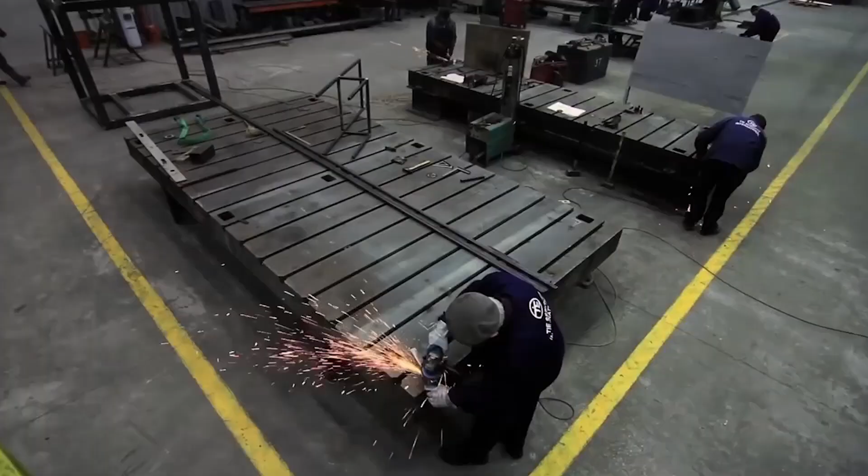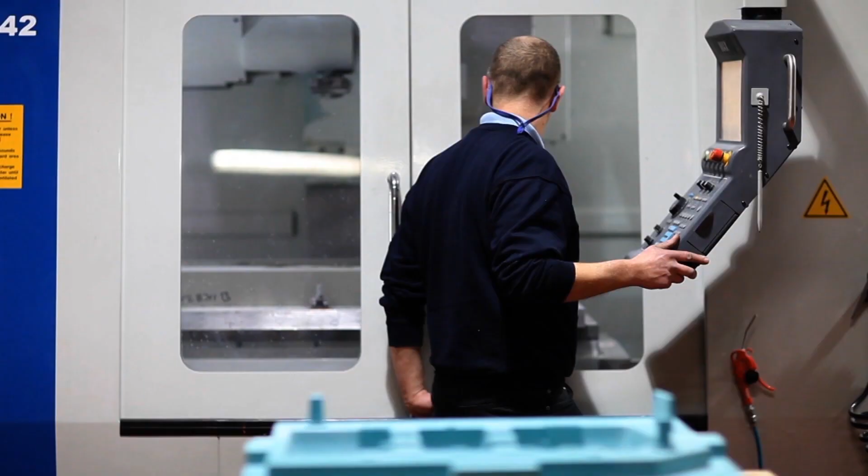Britain has a long industrial heritage stretching back over a century. From the earliest days of modern manufacturing, the UK has been a force for innovation and growth. There have been many changes over the years, but engineering continues to thrive. The move towards high-quality, high-value production has led to a renaissance for many engineers, able to compete with the world by offering the best products available. Over the next half hour, we'll talk about the place engineering has in the UK economy and how it can continue to thrive into the future.

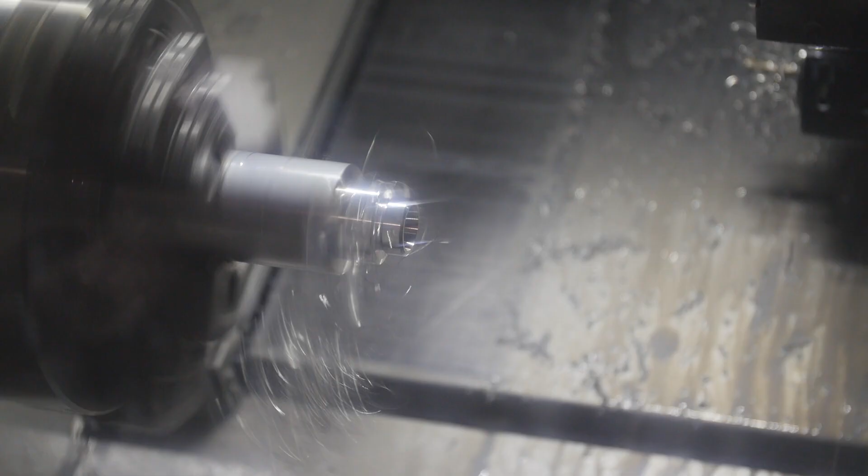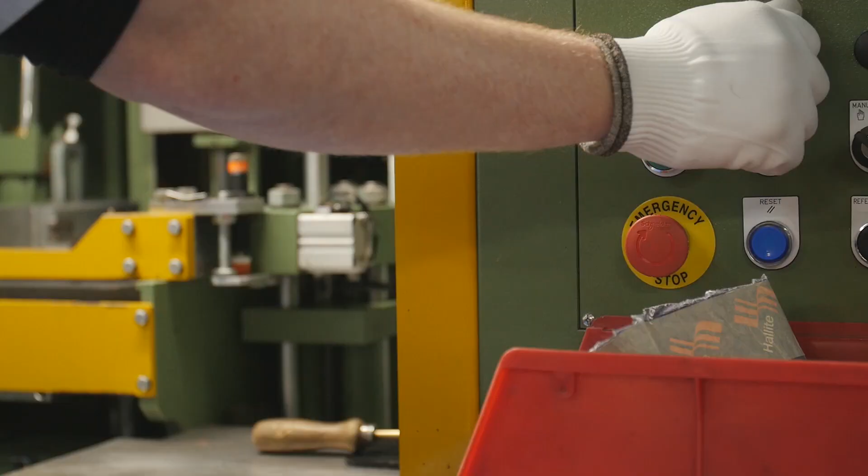I think the UK is a good place to be an engineering company. Whilst there are problems and a lot of engineering and production has been moved abroad to low-cost countries, we have proven with automotive, for example, that we can produce cars effectively and cost effectively in the UK. However, I think in the future, more and more things will probably go abroad unless UK consumers are prepared to pay more for UK products. But there is an exciting background of highly specialised companies that I think bodes well for the future.

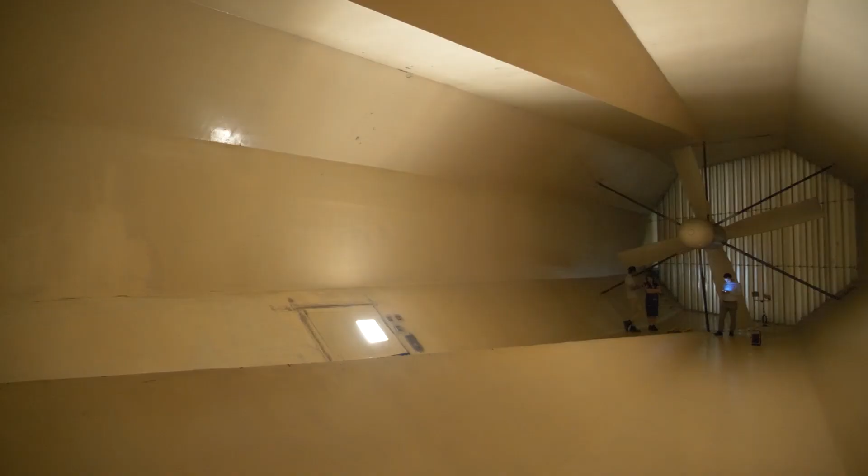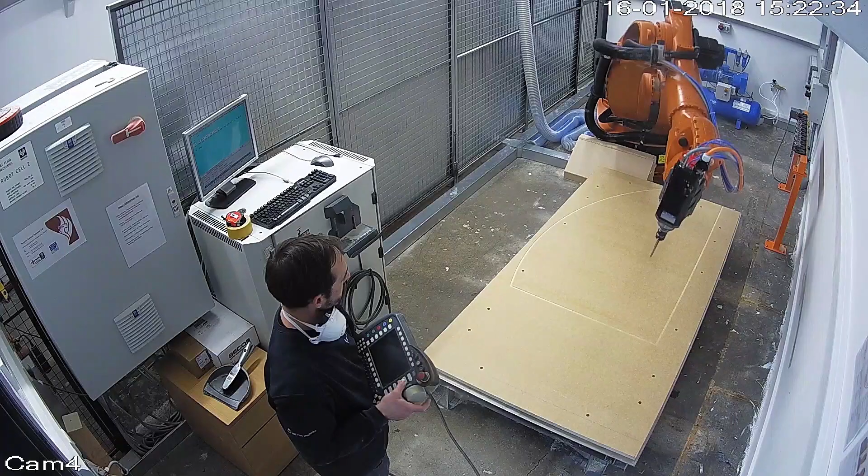I think engineering, with the wind tunnels, the history, the legacy, the fact it's so unique, you need to be a special kind of person who's passionate about wind engineering, about understanding it, solving problems, really getting to grips with engineering. You're not turning a spanner, you're actually fixing problems.

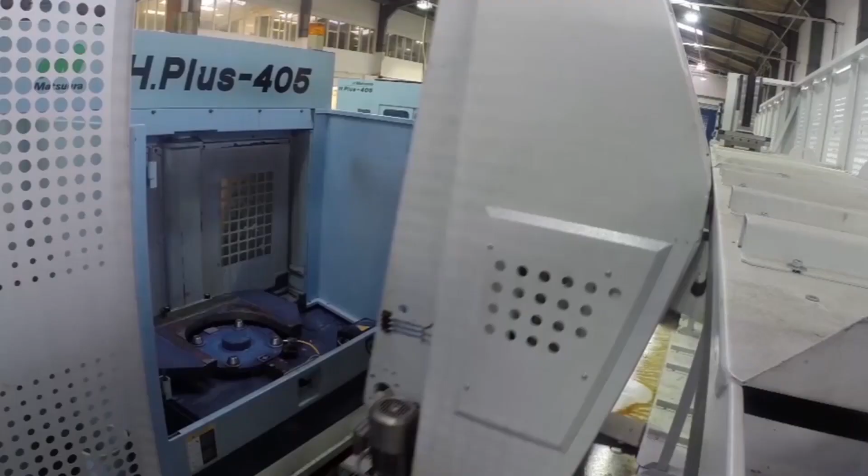The British engineering industry is quite often, if one listens to the media, you could almost think is non-existent. But in fact, I believe it is alive and kicking. It's not necessarily the sort of large companies, large manufacturers out there. It is made up of a lot of very small, very enterprising businesses that are in many cases leaders in their fields. And that, I think, is good for the future, and it shows that there is proper vibrancy within the sector as a whole, but it doesn't deny that there are problems.

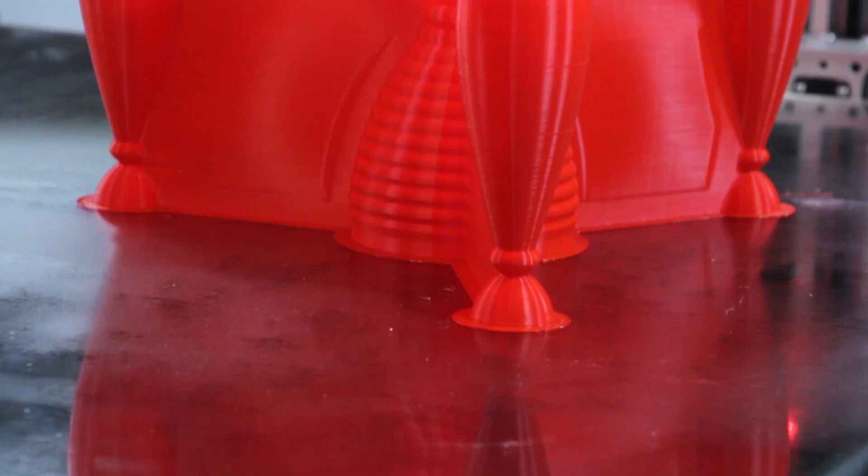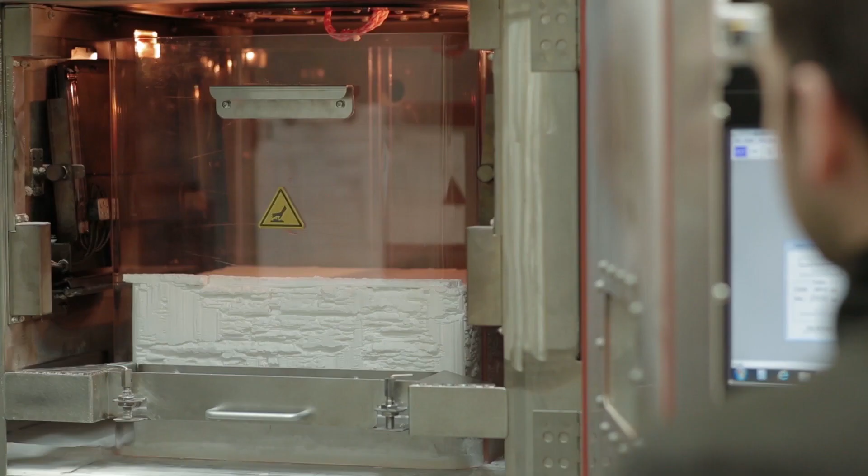In the modern world, every sector is constantly changing. New techniques and technologies are driving constant change across our whole economy, and nowhere is that more true than in engineering. Today's customers expect more from their products and expect to see new innovations coming through every year. Changing with the marketplace is critical for success as an engineer.

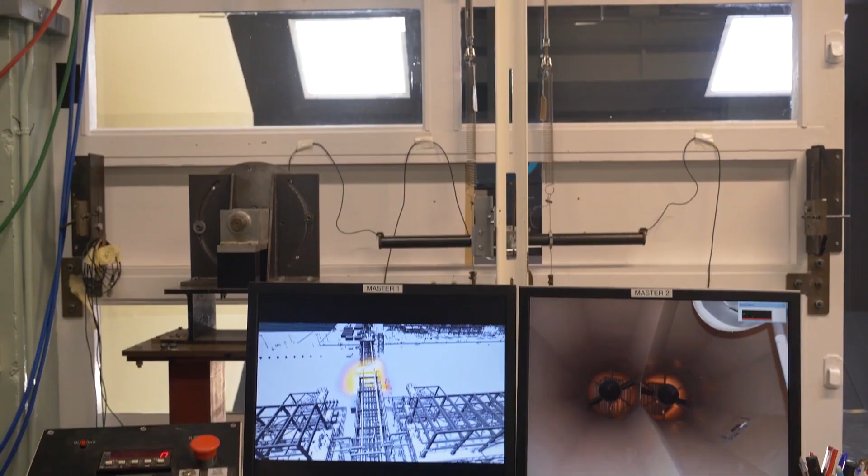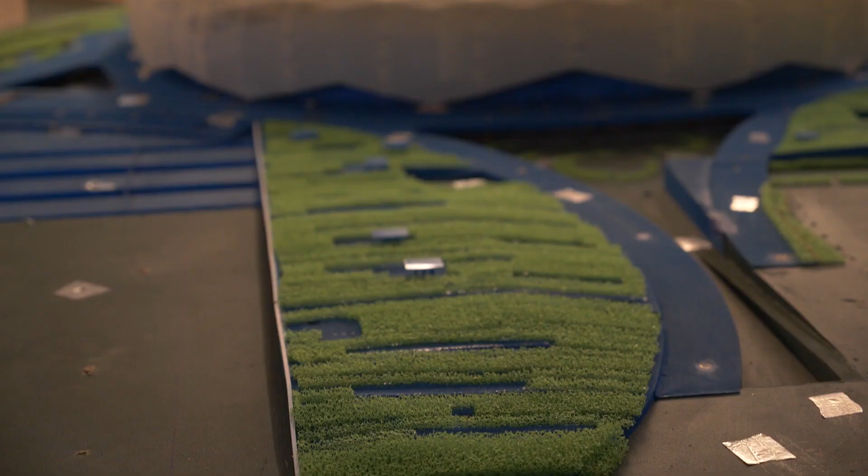Every year something changes in the market, the technology moves on, and you have to adapt. Every company has to change. Over the years we've taken on CFD, we do a lot of that sort of technology. We've increased our productivity on our models, we've got leaner processes, we've increased the fidelity of our models to increase the accuracy of everything we do.

But we've listened to our clients and we've tried to find out how we can solve their unique problems. Since we started in 1984, the market has changed enormously, not only in terms of the way we sell things, with the internet now becoming a very important way of distributing our products all over the world, but also the whole way that stuff is manufactured.

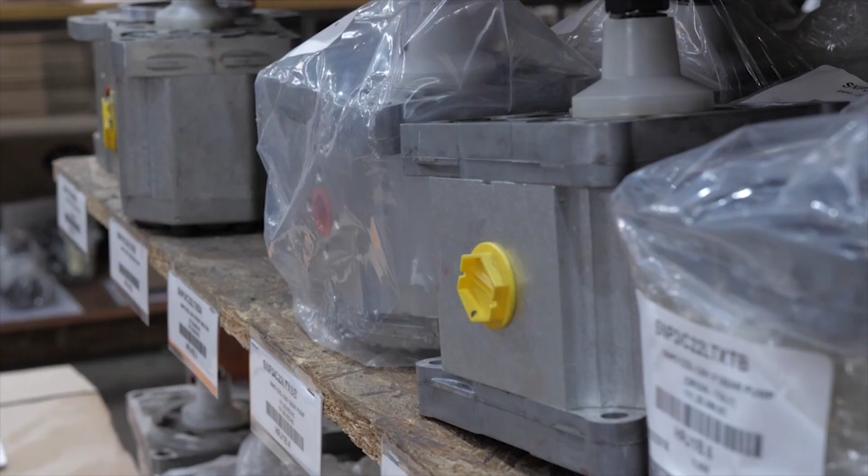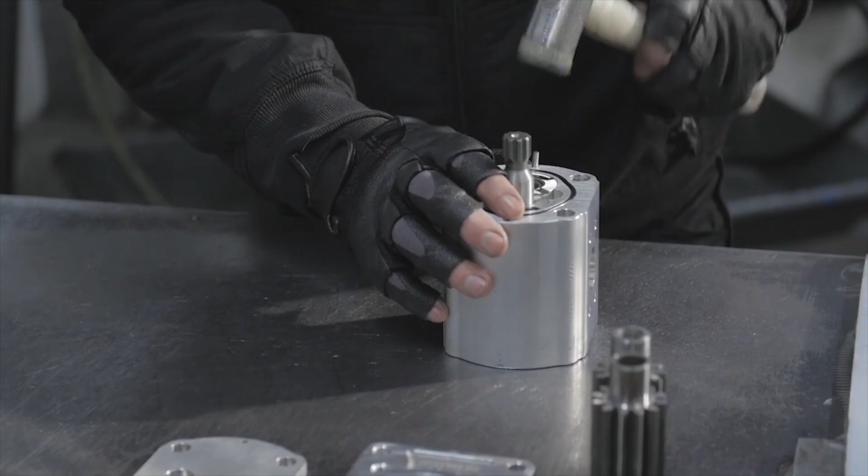The basic ideas of, say, gear pumps, which form a major part of our business, the basic concept has stayed the same and has been the same for probably nearly 100 years. But the processes in machining and manufacturing these things have allowed us to get closer and closer tolerances. Material technology has meant that we are able to now make things with stronger bodies, stronger gears, and the whole science of that has meant that we can now get improved pressures, better flows, higher efficiencies than we ever got before.

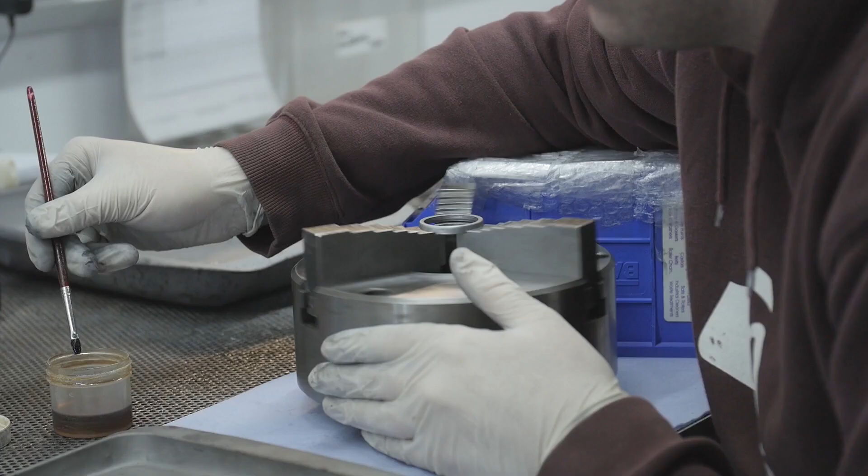I don't see too many changes in the technology of our seals in the future. We're always improving the seals as we go, but I think the changes and improvements are more due to design and our own know-how and understanding of how products work in difficult and new applications. So we're constantly being challenged by new technologies.

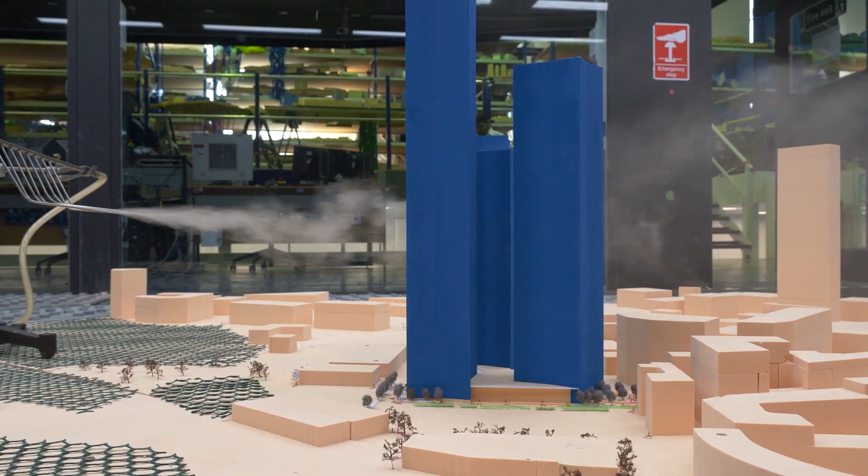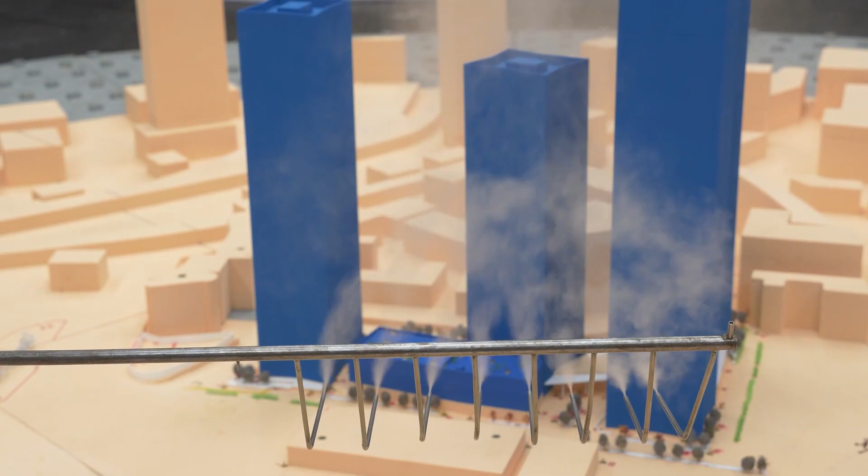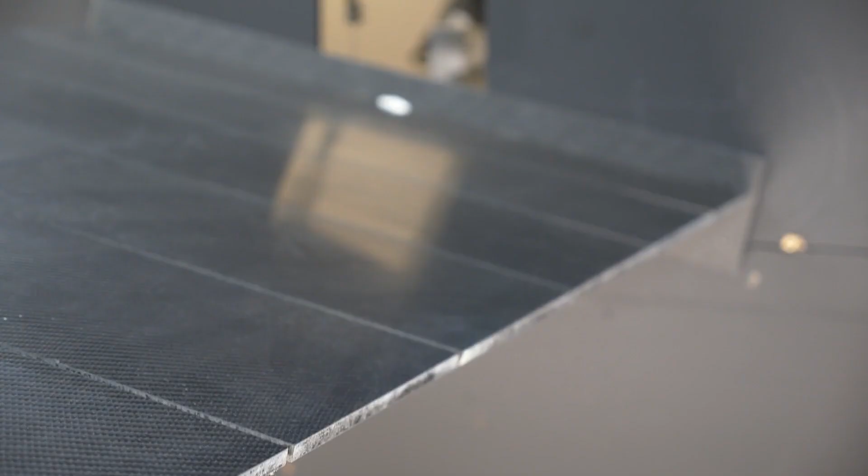What is challenging is the bespoke nature of some of the designs that we tend to get involved with. Designers do push the boundaries of what can be done every day, which is exciting. And we, as wind engineers, are there to guide them and make sure they can deliver successfully and economically the vision they have.

Along with Germany, I think the UK has got a good reputation for high quality and innovative products. I think one of the main issues we have is that when we develop a new product, all too often we see that technology go abroad, so it's lost to the UK, and we don't benefit from that innovation in the longer term.

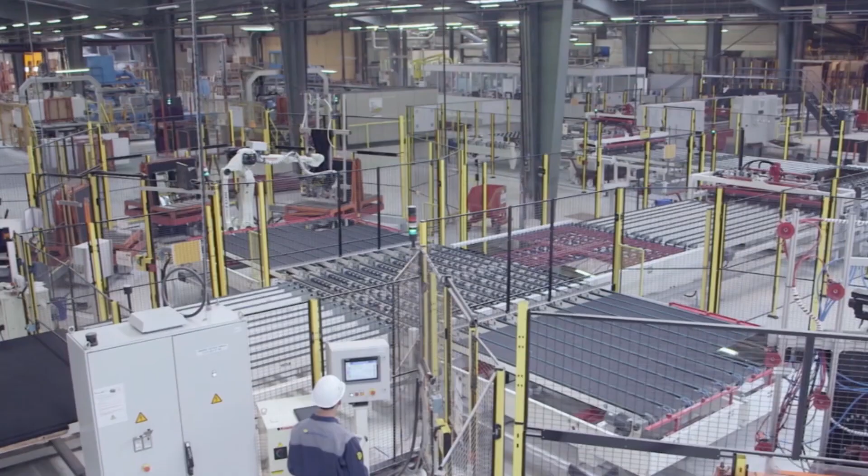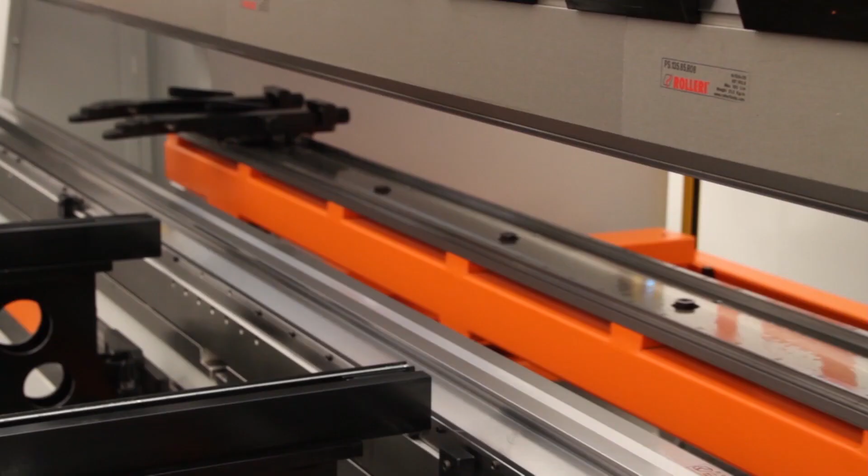Today's engineers offer more than just production services. More and more, we're seeing engineers offering a more collaborative, bespoke service for their clients. Taking a role in product design helps engineers leverage their expertise and provide greater value for their customers than offshore producers could achieve.

Typically, when a customer comes to us for a new component, we would visit them, take a look at what they're doing if we're not already familiar with it. Then we would gather all the information related to the component and the criteria they're working with, things like temperature, speeds, pressures, this type of thing.

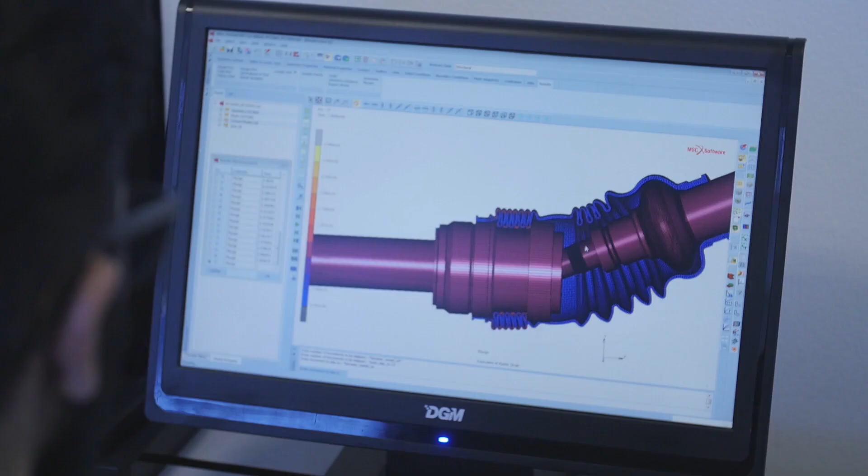We would then input all of this data into our design department, and the guys would look at it. They would come up with a basic design, put that through the FEA system, and model the design until we're happy with it. Then we would move on to production.

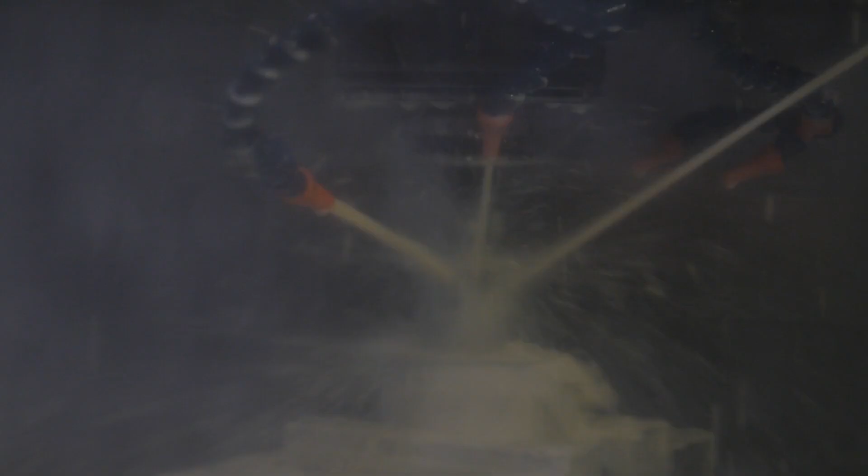So there'd be some initial sampling. Those samples would then either be tested by us or at the customer for initial approval. Once we've been through all the testing procedures and everyone was happy that the parts had functioned correctly and to the satisfaction of the customer, then we would move on to production.

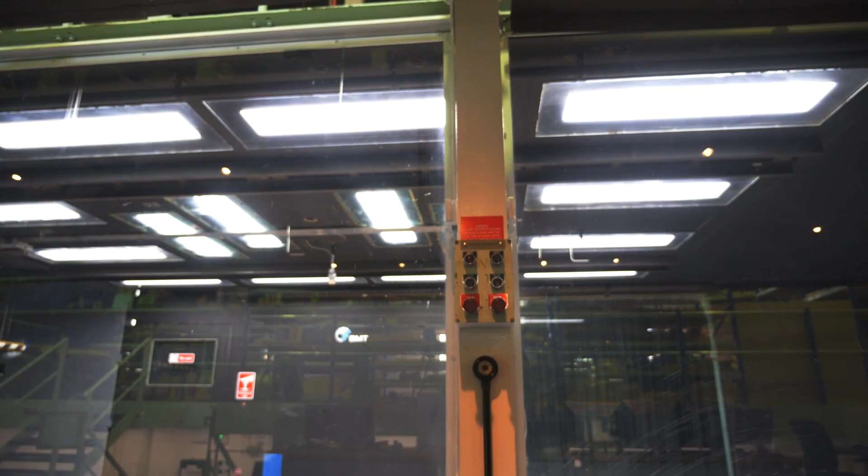The advantage of the wind tunnel compared to numerical simulations, especially within the context of relatively short timescales, is that it has the ability to model in a much more robust manner the turbulence which is in the wind. Turbulence is what can be perceived as relatively annoying when you walk between high-rise buildings. So if you think about that sort of force that can flip up skirts or turn umbrellas inside out, that is the turbulence, and that's what's quite difficult to capture inside a computer still today.

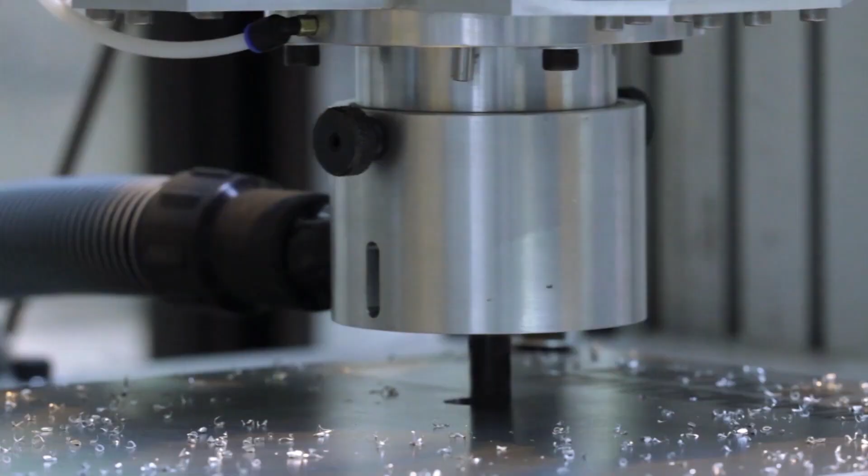Investment is a critical part of engineering. New machines and new techniques are constantly being developed, and embracing these advances is essential to keeping a competitive edge. Making the right investments can be extremely challenging.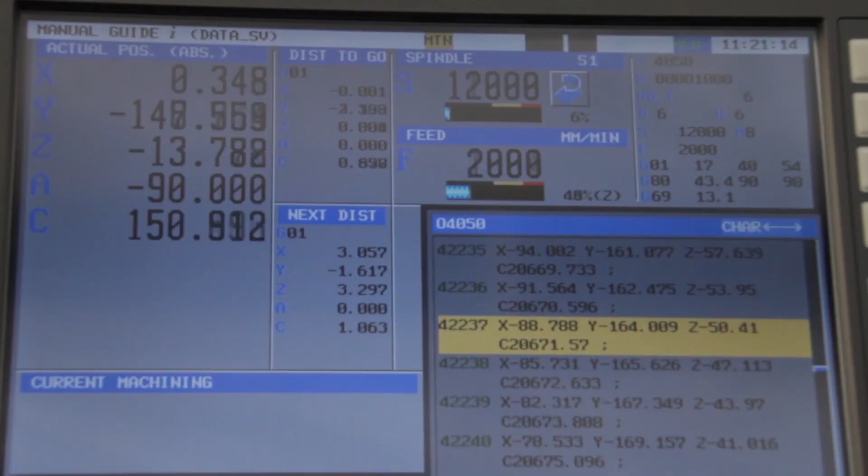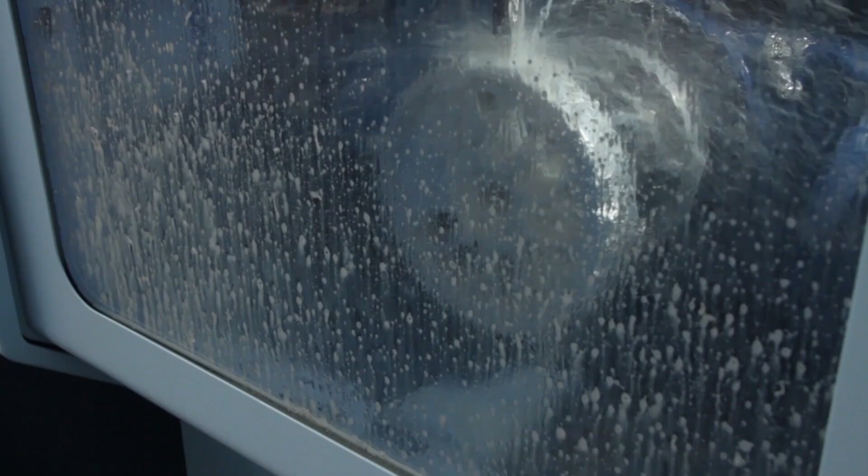Finding the right times to buy into new technologies requires both a clear understanding of the market and a robust knowledge of the technology. But for those who make the right investments, there are huge advantages to being first to market. There are businesses out there, very vibrant, particularly small businesses, who don't look on needing a payback within six months, but actually look to a long-term return on things.

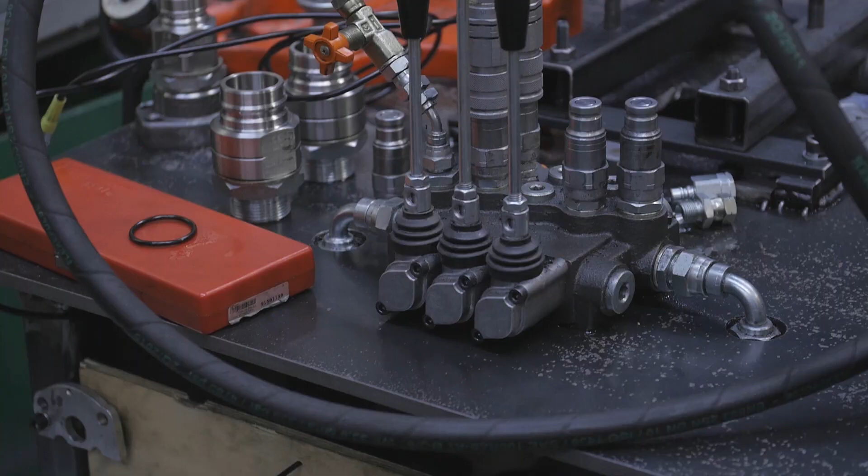And are investing in new equipment. You just have to look at machine tool sales, which are very strong in the UK at the moment, because firms are investing in new equipment.

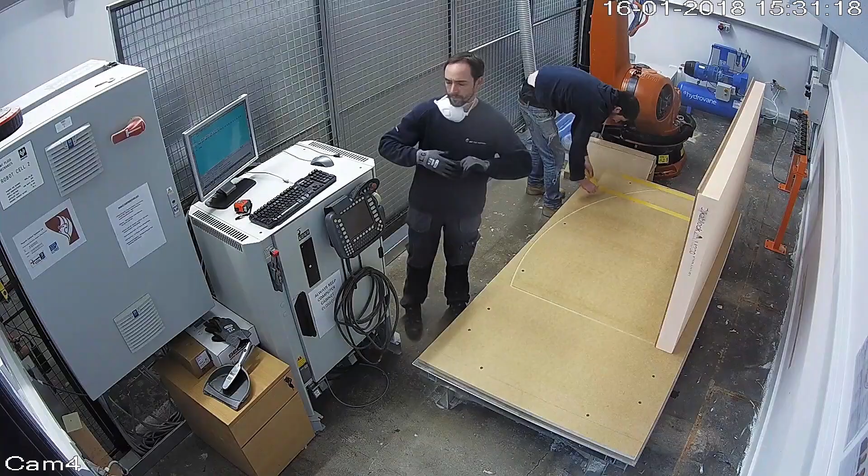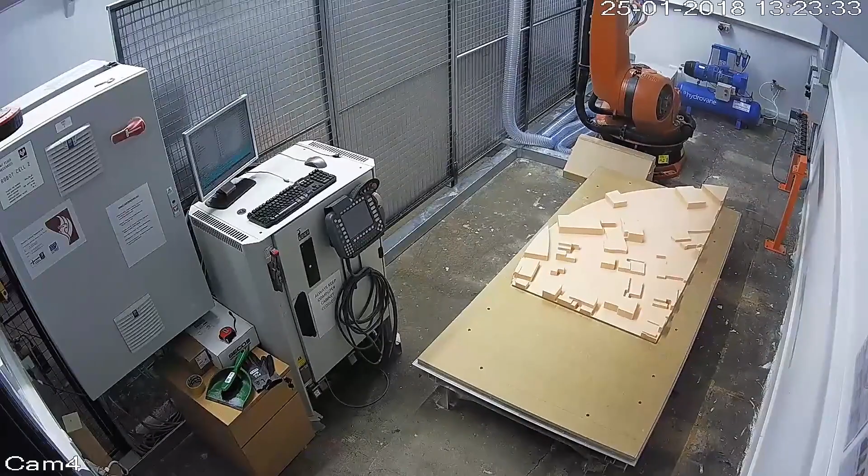And it is essential that we do. Our life is inevitably becoming quicker every day. Everybody is expecting results yesterday. There is the need to push quite hard in new technologies, a smarter use of big data handling, for instance. So I can see quite a lot of potential in technologies like machine learning and artificial intelligence.

I think it's been really important for us to keep up with new technology and have new equipment, and also training our people. We can't afford to drop behind. We're trying to be at the forefront of sealing technology, and this demands that we have up-to-date equipment and look forward to where sealing is going to go in the future.

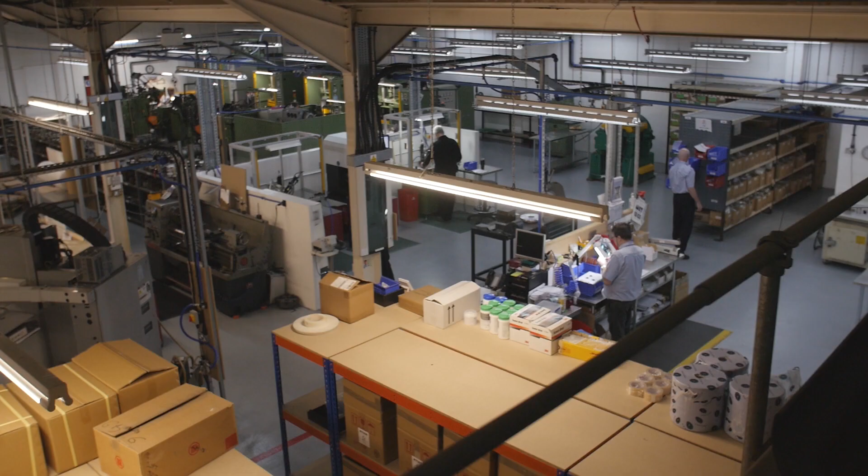Automation is a key factor, particularly in the UK, because we need to take the labour cost out. The ability of automation, and things like additive manufacturing, which is a very new process, still has a long way to go, but it has the potential to make products better and faster. It's a few years away from that, though - at the moment it's very expensive.

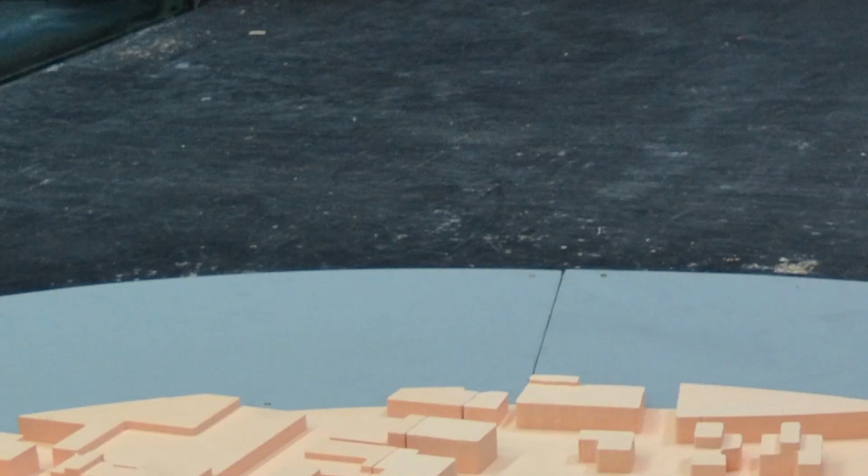Computer simulation, numerical simulation, started becoming used commercially, especially in wind engineering, roughly I would say between 10 to 15 years ago. So in that sense it is a relatively recent trend in the industry.

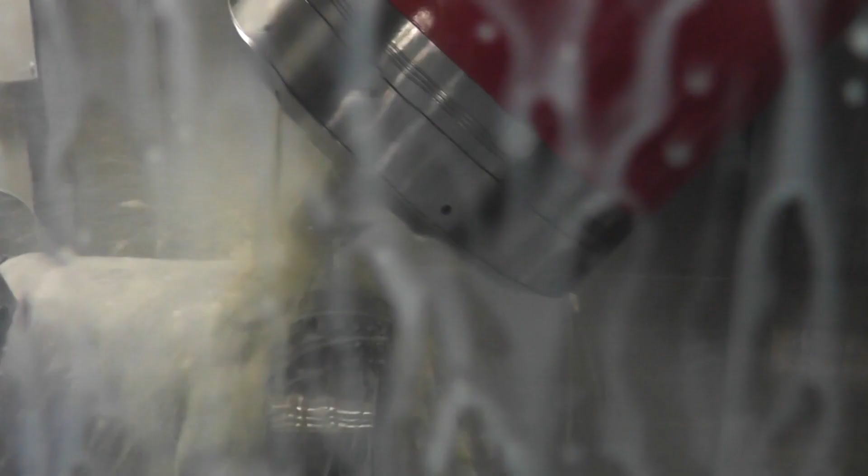Modern engineers need to have a broad base of expertise. They cannot afford to be overly focused on singular materials or approaches. Bringing together a variety of techniques and the expertise to combine different materials is critical to serving the modern market and delivering ever more complicated products.

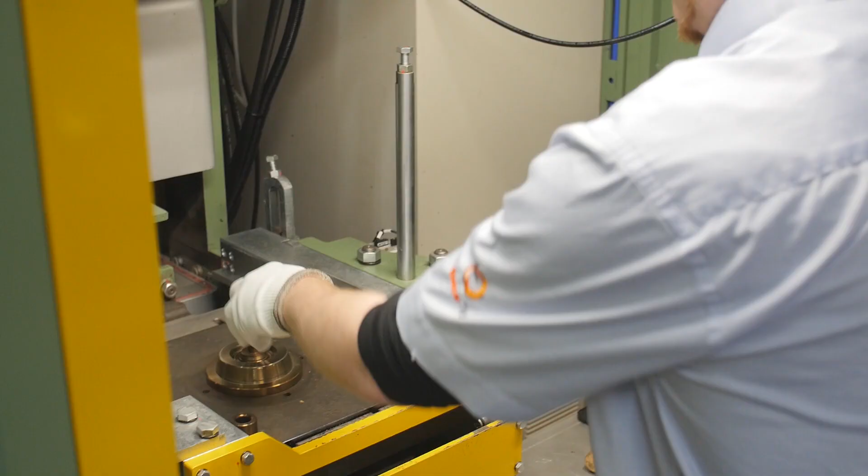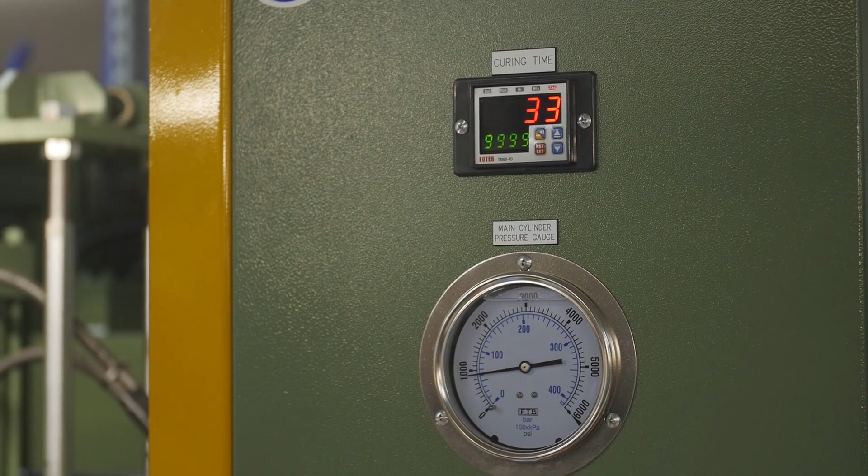The manufacturing of seals at Race-Tec is carried out through a process called compression molding. Typically in a seal there may be a metal component, a rubber component, and a PTFE component. All these parts go into a mold, then into an oven under pressure, remaining there for typically 5 to 8 minutes. When the part comes out, it's in a semi-cured state, but fixed, so dimensionally it's stable. Once out of the mold, it goes to finishing, trimming and inspection, checked to make sure it's dimensionally accurate with no faults in the rubber.

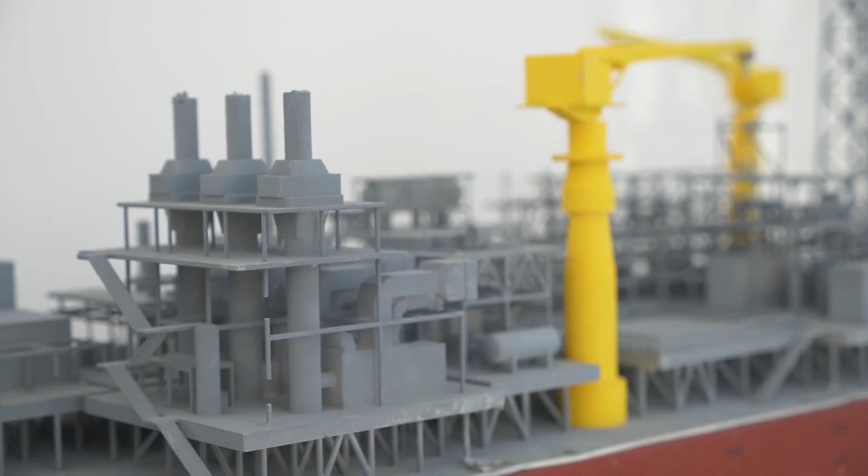In a broader sense, fluid mechanics is used to assess the aerodynamic performance of other types of structures as well. It can optimize the performance of Formula 1 cars or supercars, or from a hydrodynamic point of view, structures which lie underwater. You can take it to another extreme and study biological fluids like blood.

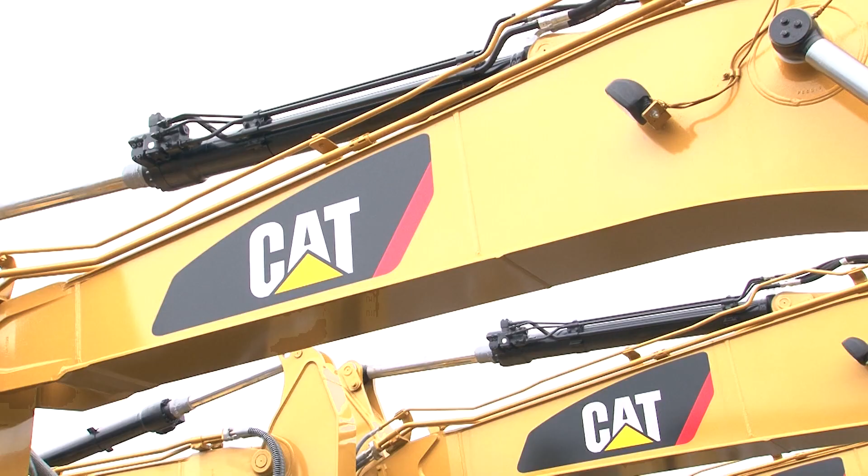Hydraulics are a major part of an enormous number of industries, but probably go pretty unnoticed. When you look at an excavator and see arms extending or buckets lifting, that is quite obviously hydraulics. But then look, for example, at a gritter going past - the conveyors and the spreader are probably all driven hydraulically.

The brakes in everybody's cars are hydraulic. Quite often it's used in disabled access machinery for lifting people in and out of baths - it's hydraulic. So hydraulics pervade really every area of our lives.

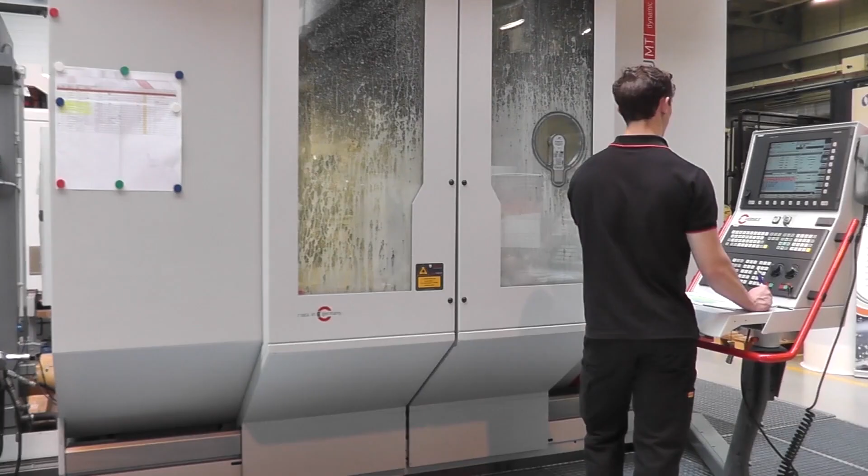People are a critical part of every business. In manufacturing, achieving high-quality results demands a well-skilled workforce who are able to adapt to a changing workplace. For many engineers, the arrival of greater automation has driven investment in skills and training, ensuring that staff can continue to contribute and bring fresh ideas into the business.

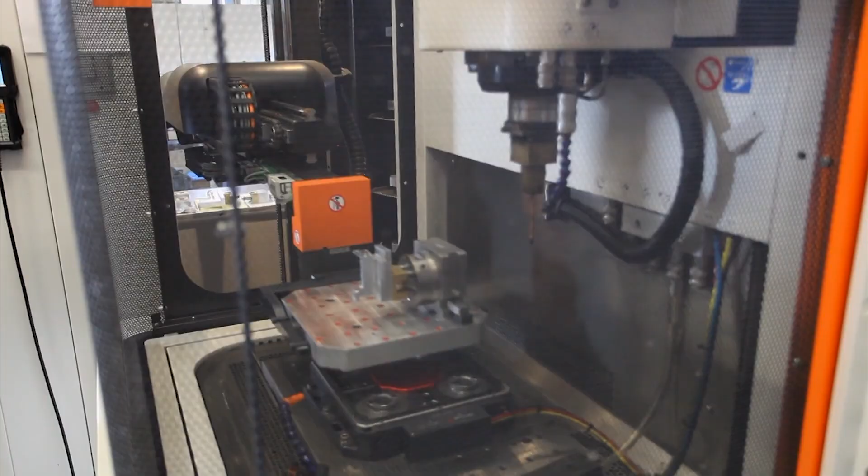UK employers have been too ready to take on relatively low-cost labour from Eastern Europe and elsewhere, rather than actually investing in improving the productivity in their businesses.

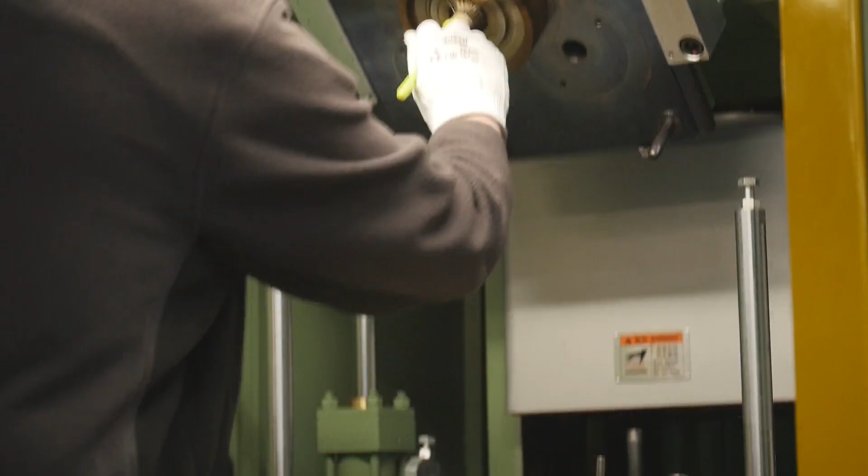One of the main challenges we face at the moment is finding the right people. Sometimes even finding qualified people is okay, but finding people that can actually help move our business forward - that is even more challenging.

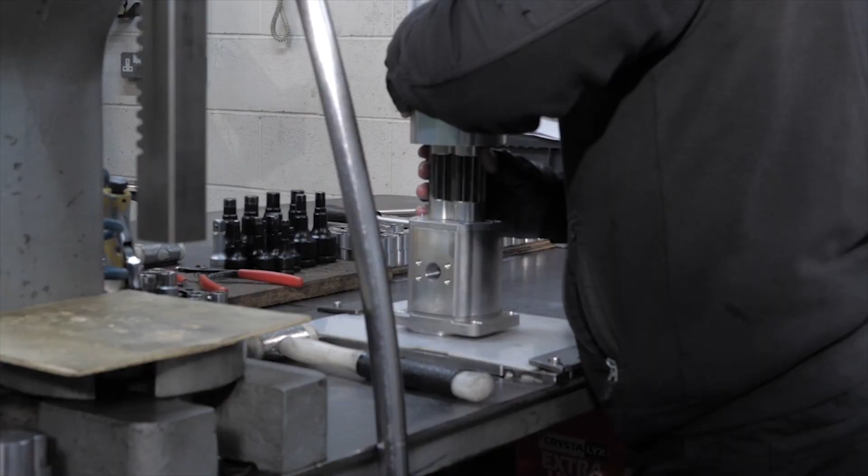I think there's been a big problem with new talent coming in. Looking at it from a mechanical engineering perspective, which is the field hydraulics most closely relates to, there's a lack of practical knowledge that graduates coming into the industry have now, whereas before they had to do an element of practical work. Now a lot of things are theoretical, and they have very little perception of what materials feel like, what actually happens when you cut metal, what happens when you actually integrate components.

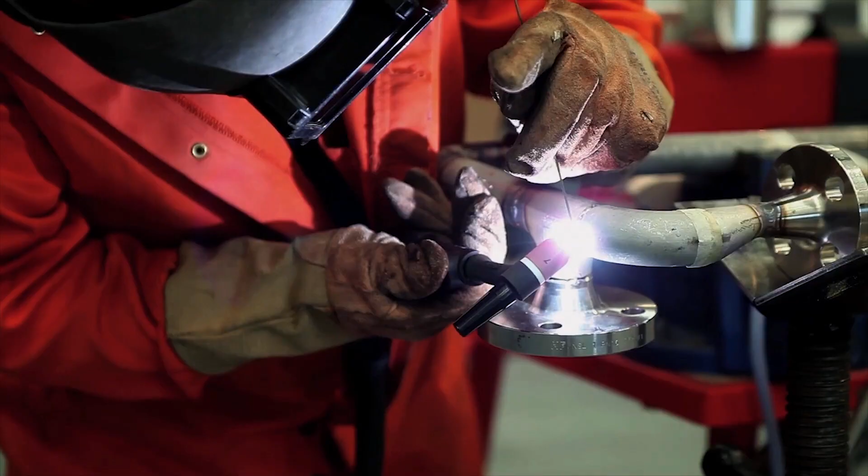Everything's been on paper or modelled, and it's not the same thing. You cannot model what a bit of steel weighs. This whole practical side of things, I think, has been ignored.

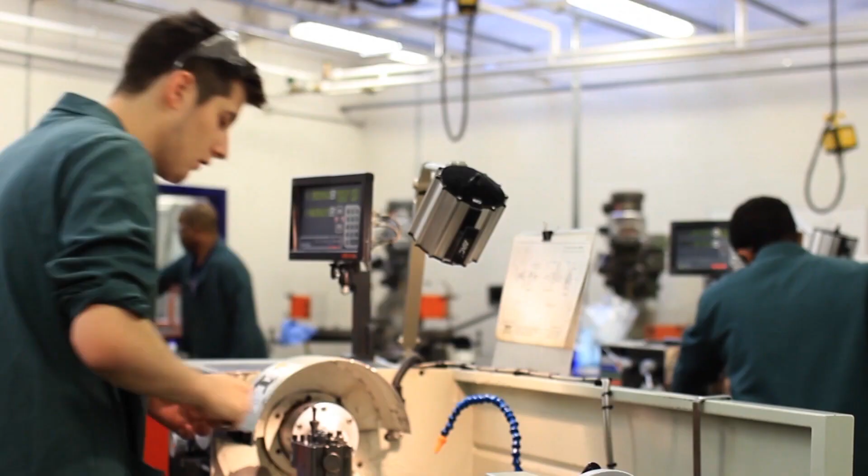In the UK, there appears to be a distinct lack of interest in engineering from young children. I know when I look at my own sons and compare it with how I came through engineering - it's not encouraged in school. The profile of it is not high enough in schools. The whole business of getting young people to actually see engineering for what it is, and see the breadth of skills that are there, the breadth of areas where it is used.

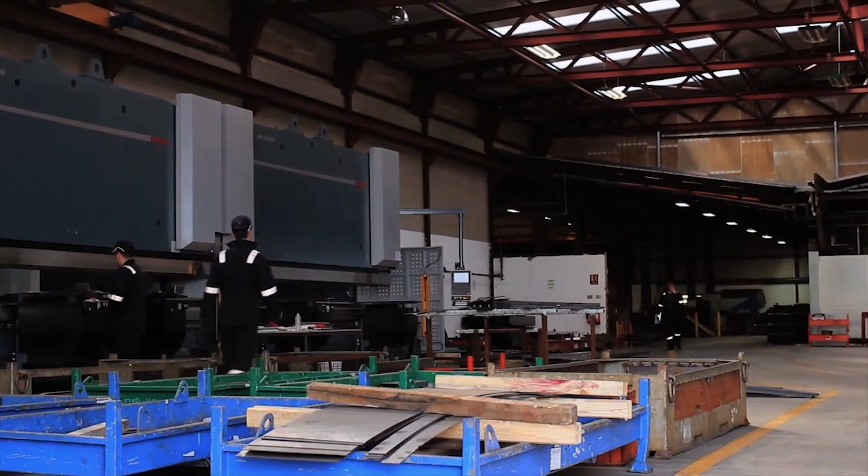There are a lot of people my children's age who have gone to university to do engineering, and they have no intention of doing engineering when they come out. They all want to go into the city or something like that, which actually, if they go into engineering, they can probably in the long run do as well and have a much happier, more fulfilling life than sitting in front of a computer screen counting their money. There's already a shortage of engineering staff in the UK, and it's something we should tackle during the Brexit process.

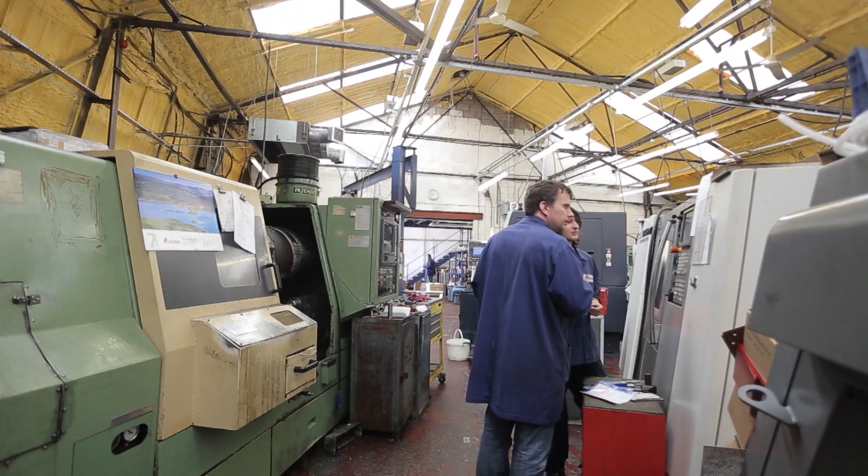The next generation of engineers is a critical concern for today's engineering sector. We often hear how young people are less interested in joining the engineering sector, and the industry has made real efforts to change that. Through apprenticeships and graduate programs, many companies are bringing young people into the workplace and giving them a taste of what the industry is really like.

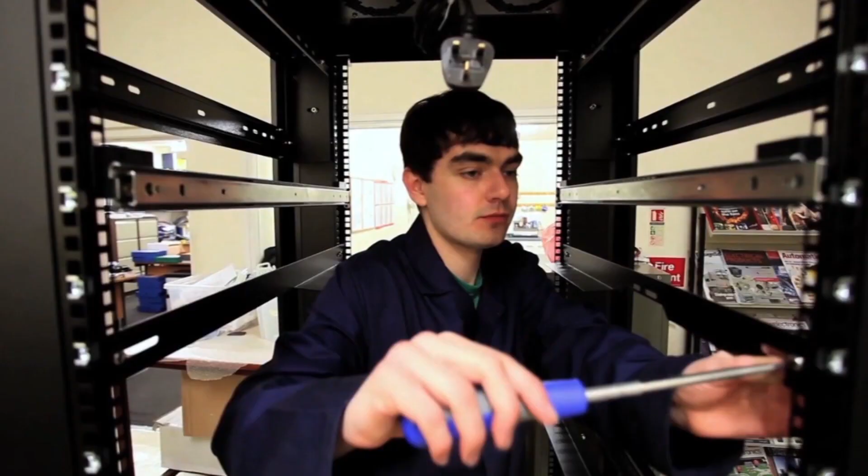The engineering industry has to start taking a more active role in attracting talent. I think the key to this is getting people involved from an early age and really building that interest. We're going to need to start talking to local schools and teachers and getting young people interested in engineering. We do get a lot of graduates inquiring about it.

We get people that have done, say, maybe aeronautical engineering, mechanical engineering, civil engineering. There's quite a lot of sectors and degrees that can flow into this field, which is great. Even mathematics and analysis and statistics will flow into this field. And we find that if you're the right type of person that's got this passion to learn, then we can mould you and teach you the different parts that you need.

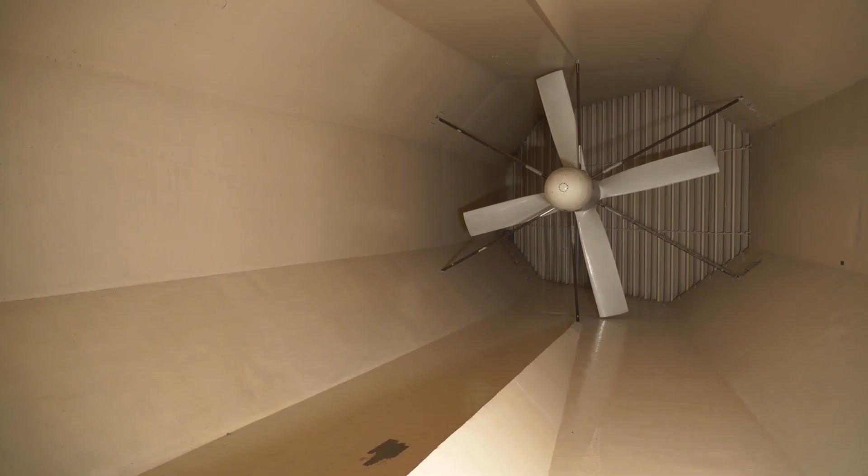We do get that. So we take on graduates and apprentices most years, build them up through the company so they have day release, back to university, things like that. A lot of the time we take them on as our wind tunnel engineers, wind tunnel technicians, but then they move into the project management engineering teams, and we basically build people up through the company.

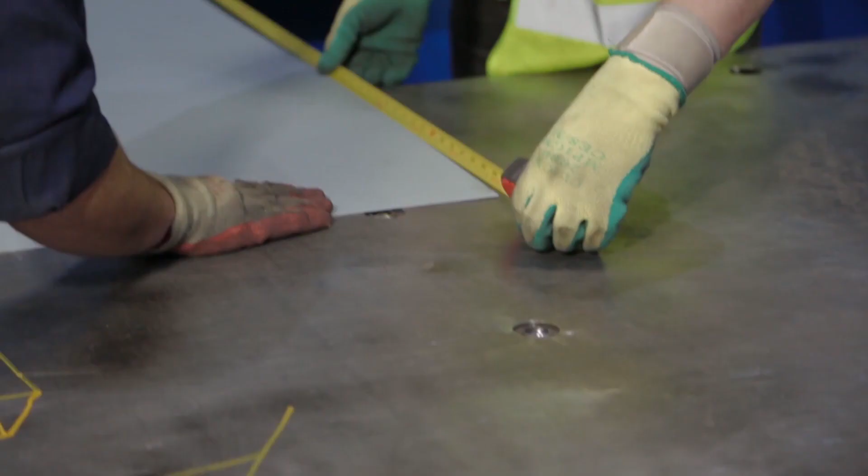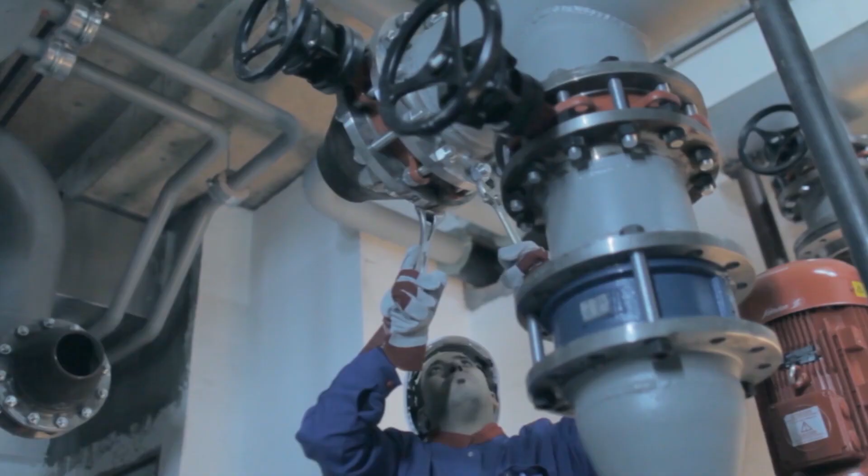Apprenticeships have funny connotations for different people. But what actually being an apprentice, if one goes back to the basic meaning, means somebody who will learn from someone else, learn from someone who has already learnt how to do something. And I think the problem we can have with apprenticeships, and I think they're good, but they should not become a sort of rigid structure by which this is the apprenticeship path, because we are all apprentices and we should all be apprentices all our lives.

We have some top quality universities that are driving research and development and working very closely with UK companies. That pushes us forward, and it gives us the benefit of being able to work with those innovations and technologies and monopolise on them before they can be picked up in other countries.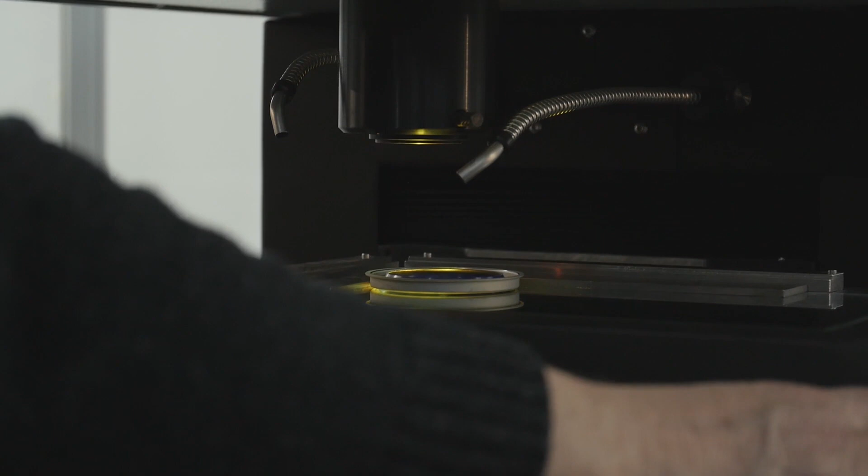Young people coming through university are often not looking to get into the more practical side of engineering, so this does create some problems for us. I think we really could do with getting the prestige back in engineering, so that people do look at it as a career.

In schools these days, they no longer seem to teach things like metalwork and woodwork and technical drawing, which are things that typically engineers of today would have done when they were at school. It more seems to be design and technology, which doesn't really give them maybe some of the hands-on training that our generation possibly had. And also the type of equipment people are buying these days.

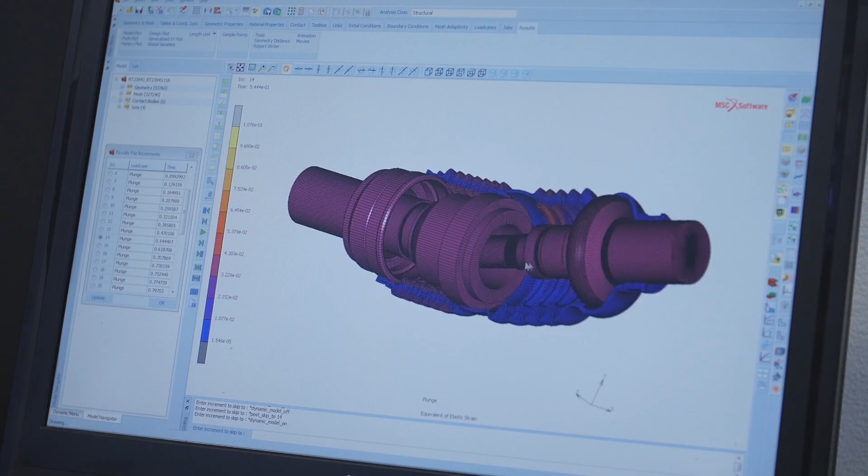We're in rather a throwaway society. I think many of the engineers today, when they were growing up, would have been fixing their own bicycles, fixing their own motorbikes, fixing their own cars. Whereas nowadays people tend to buy things, and if they have a problem with their high-spec bicycle, they take it to the bicycle shop and get it fixed. So a lot of these hands-on skills have been lost, and I think that's something that maybe the government, certainly education and industry, needs to try and improve on and start at a younger age.

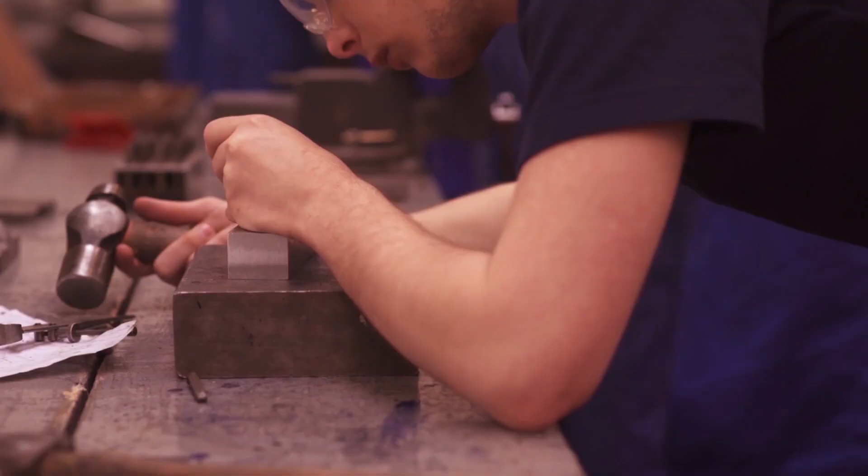I think it's important for industry to engage with schools and universities. It is difficult for smaller companies to do this because often the resource and the time isn't available.

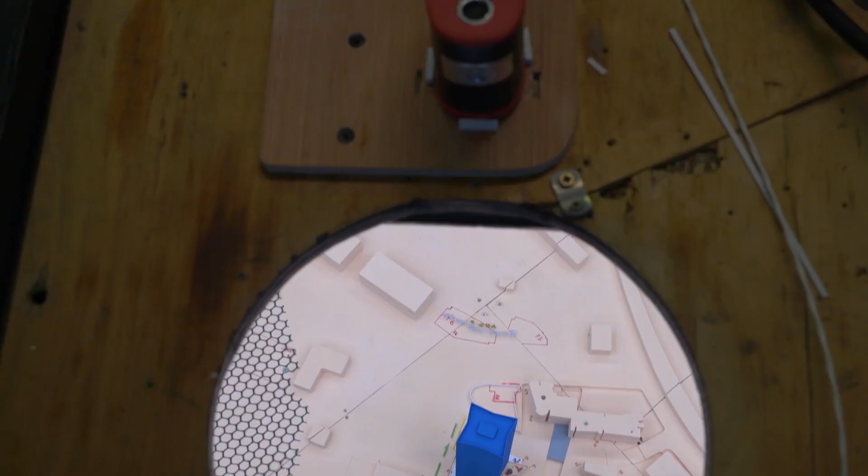So I do think it's something that the government should probably lead with, and larger industries should try and get maybe more schemes and more support for younger people to try and get them back into engineering and put the prestige back in engineering. We also offer 6-month internships for people coming out of university. We often find that this gives them a great foundation for moving on somewhere else in the engineering world.

Or they come back to BMT and start their career with us. As a company, BMT is highly dependent on attracting staff and talent from the EU and beyond. Moving forward, there's some uncertainty over whether we'll still be able to do that, and it's a real challenge to the industry.

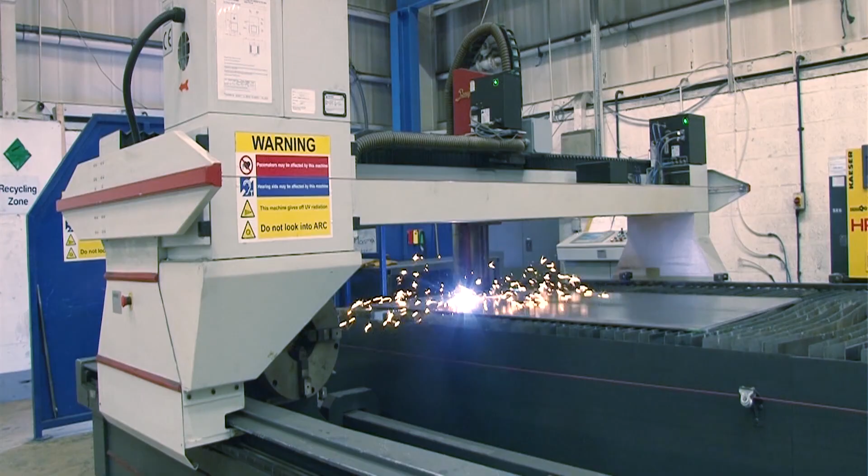It's an exciting time to be in engineering. The future promises many exciting changes in the coming years, with new materials and advanced products becoming the standard across the industry. The only real certainty for engineering is that it will remain critical to all of us, and the kind of products we need will continue to change.

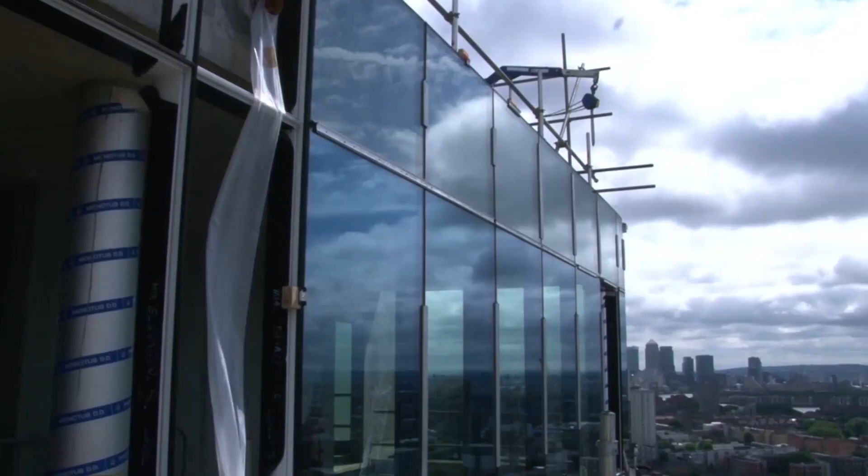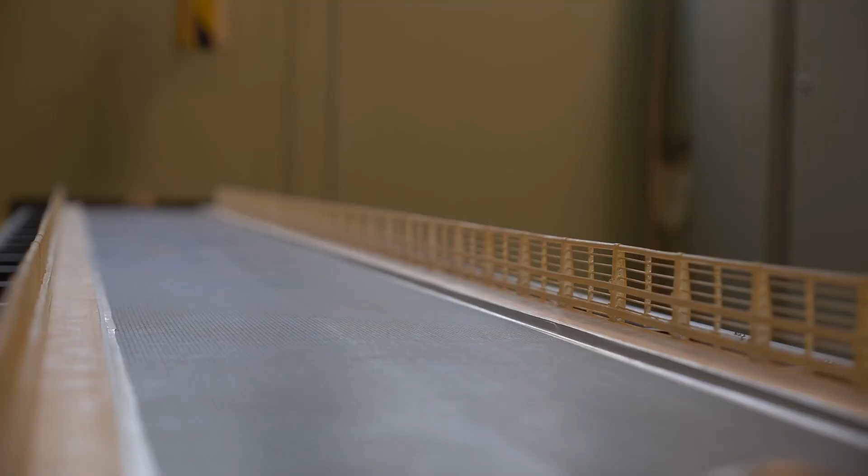I think the future of construction is incredibly exciting. We can already see today where the future is actually going. We've been using, for example, 3D printing technology here at BMT for quite some time. We have more recently bought a couple of robots which are helping us in making the models that we need to use for the testing that we are conducting.

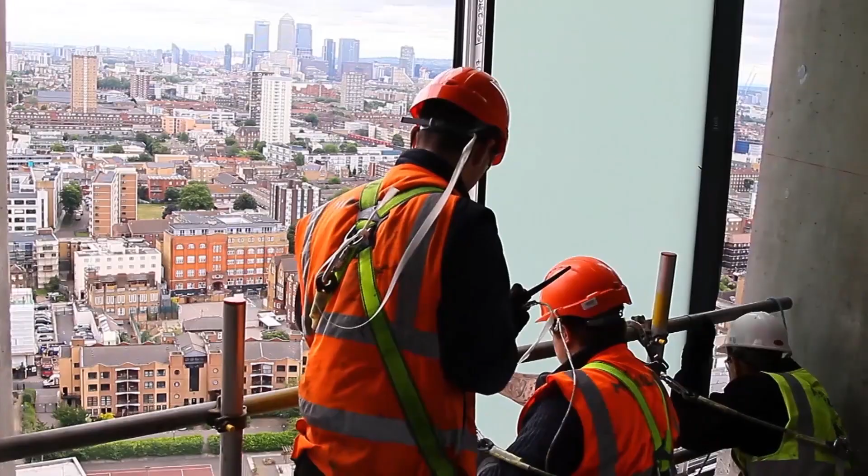And then at the same time, if you look at the wider industry, the same kind of technology, and therefore robots, 3D printing, has been used or is started to be used more recently. We know that, for instance, there's a strong push, especially here in the UK actually, on modular constructions, which is nothing particularly new, but people are actually pushing boundaries, started using that technology for taller and taller buildings, and obviously that's why they need input from people like us to actually making sure that everything is going to be designed and built in a very safe way.

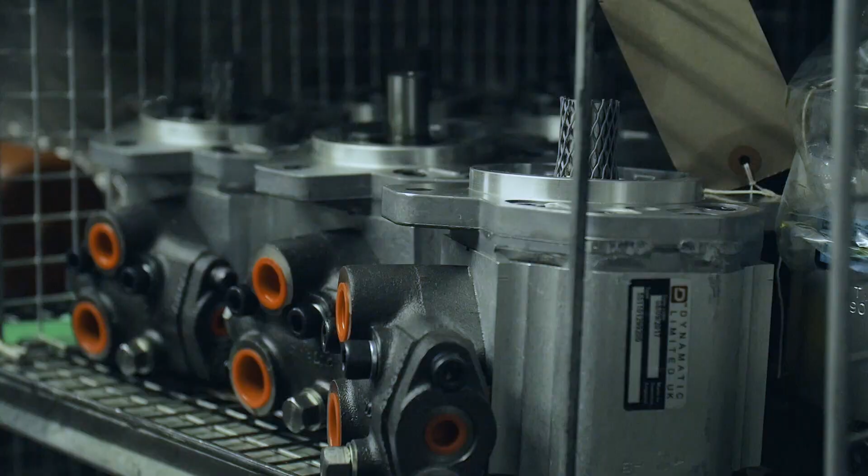Growth in the coming years for our products is going to be... I always think it's going to be a continuation of what you're doing, but I found over the years that does not work. We've had to sort of not exactly reinvent ourselves. We've always done hydraulic since the very early days. We've always done hydraulic components.

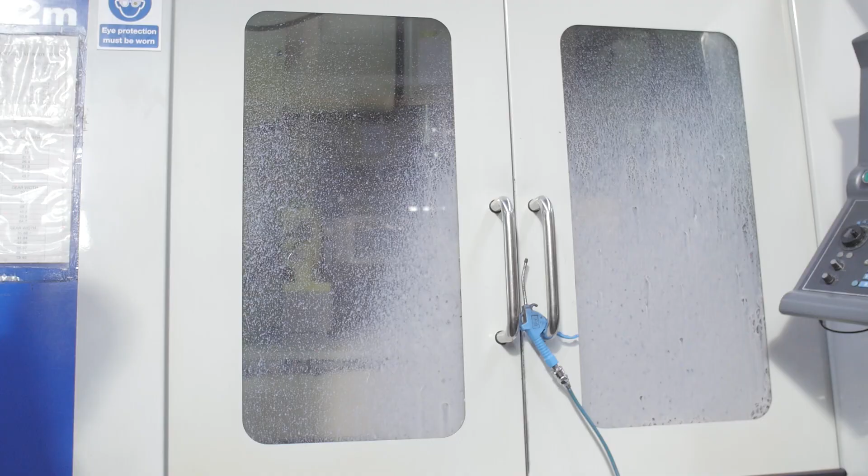But we've seen how we used to sell a lot of bulk products, lots of, say, one part number to one or two customers, and that formed a large part of our business. That's almost totally disappeared, and so now we're selling a large range, but in very small quantities, to a large number of people. I see our skills developing in terms of increasing the range of pumps that we actually manufacture here, which basically started as something to complement the range that we distribute, and it still does.

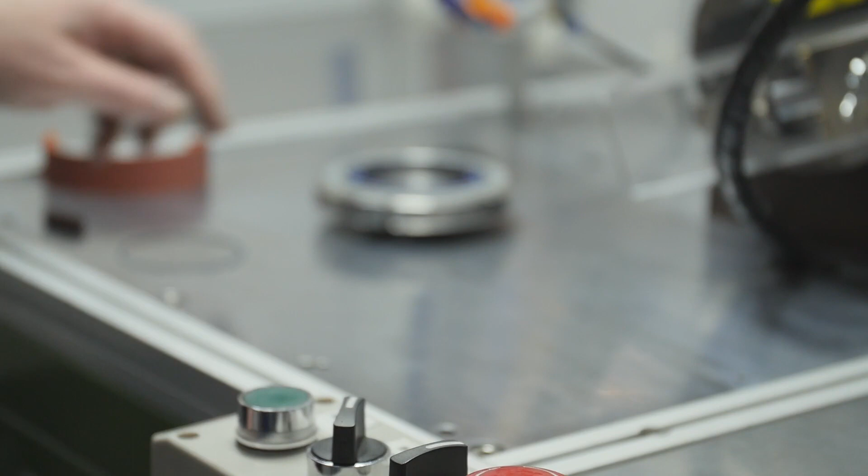I think the future is quite exciting for everybody. There are lots of high-tech industries within the UK, and if we take our own market, for example, we predominantly deal at the moment with motorsport. But supporting all of these high-tech motorsport companies around the UK, there are a significant number of small engineering companies, high-tech engineering companies, which are supporting this industry. And all of this technology and these high-qualified, high-class people are available to the rest of the UK industry. It's something we should be probably proud of, and something that industry in general should make more use of.

I think in the future more and more expensive consumer products will be more and more customized. There's always going to be a place for cheap repeat products, plastic spoons, plastic cups, for instance. But I think in the future there will be more and more demand for the consumer to be able to select the particular qualities that they want from a given product. And to some degree that's what we're already doing here at Race-Tec.

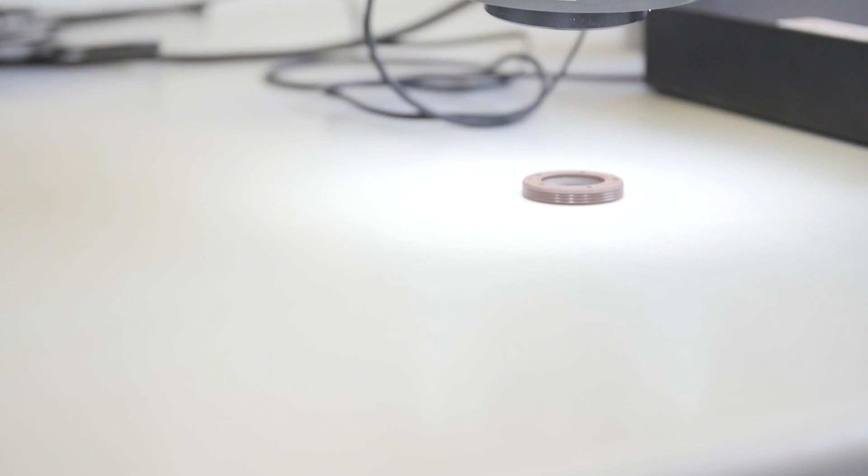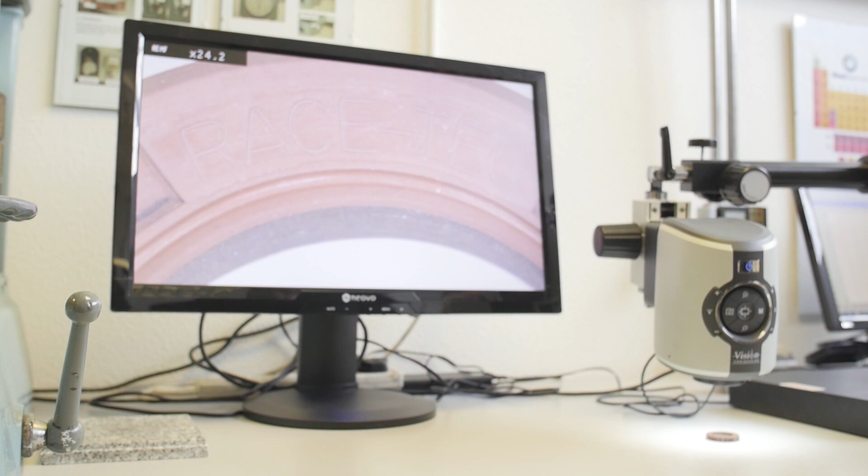More consumer products will be moved abroad to low-cost economies, but I think for the UK there's still a big role for specialised, innovative companies to come up with quality products, reliable products that they can put out into the market. I think the key areas for the future will be things like robotics, electric vehicles, battery technology, environmental products, and maybe nano materials and this type of thing. So I think these will be the strong areas for the UK in the future.